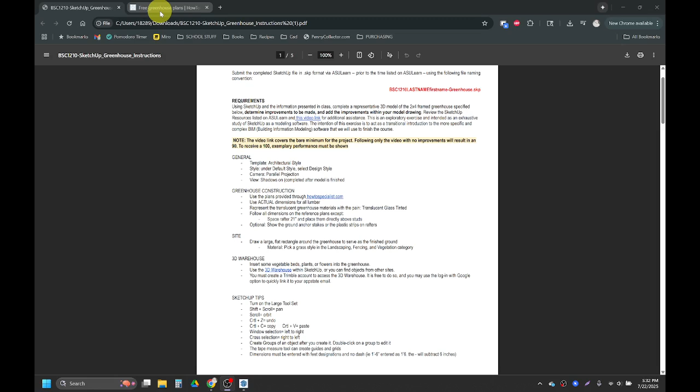We're going to follow a couple of instructions through our instruction file on ASULearn, but a lot of our measurements and pieces are coming from this website, which is also linked into the instructions for this basic greenhouse design.

The first thing we're going to do is open up a blank SketchUp file through the architectural template. We're just going to wait a little while for it to launch.

I have my SketchUp situated a bit to work with how I like my toolbars. If you're opening SketchUp for the first time, to change your toolbars around, go into the View tab and then Toolbars. By default, you only have the Getting Started tool set, but I prefer the large tool set over the Getting Started tool set.

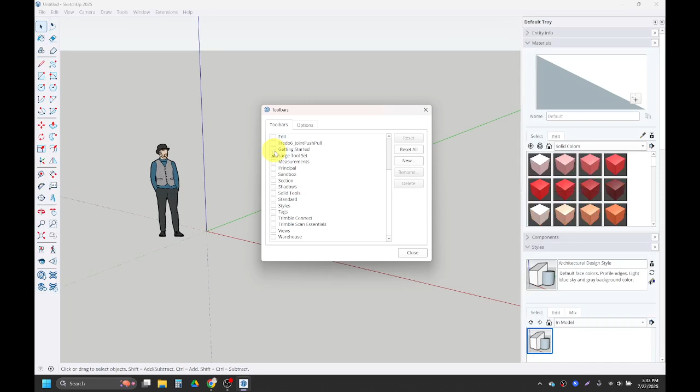I also like to have the measurements checked off, that way I can see what I'm working on down here. I also like the views option so I can quickly snap to my orthographic views. Then close out. The other thing I prefer when working in SketchUp is to turn perspective mode off.

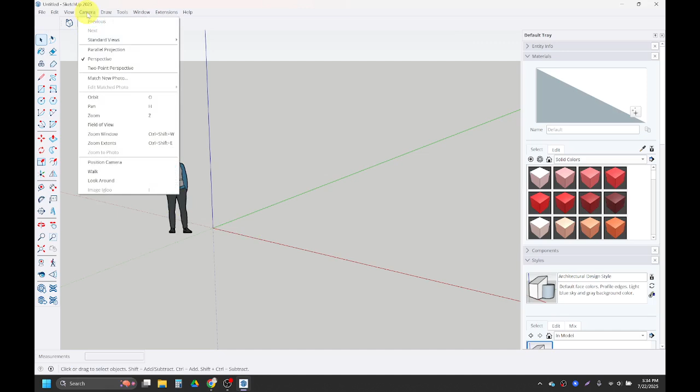I like just working in parallel projection, so I'm going to go into my camera and turn parallel projection on instead of that perspective mode.

Our first step is to lay out our 4x4 base of our building. This is going to be made out of just 4x4s, and it's 10 feet wide and 14 feet long. We'll make those 4x4s 3.5 inches in both directions to use actual dimensions instead of nominal.

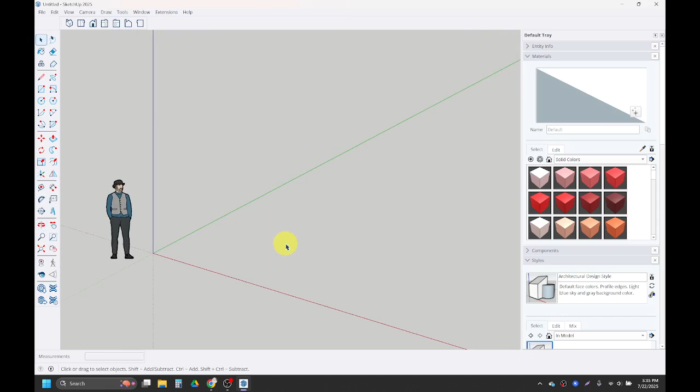As a reminder, to move around in SketchUp you can click your scroll wheel down like a button to orbit, and hold the shift key with the scroll wheel to pan around. To start with that base, I'm going to use the rectangle tool, keyboard shortcut R, or this button here.

I'll start it right on that origin point. I'm going to pull myself diagonally, making sure I'm getting that blue feedback. I'm going to type 10 foot, making sure I'm putting that single apostrophe, comma, 14 foot, enter.

Now to bring in the thickness of that 4x4, I'm going to use the offset tool, keyboard shortcut F, or this button right here. I'll click on that rectangle's face, make sure my cursor is on the inside, and type 3.5. I don't have to put the inches mark, I can just hit enter and it'll assume inches.

Then I'm going to hit the space bar to go back into my selection tool. I'll click on this inner rectangle here outside of the perimeter one I offset, and hit the delete key on my keyboard to get rid of it.

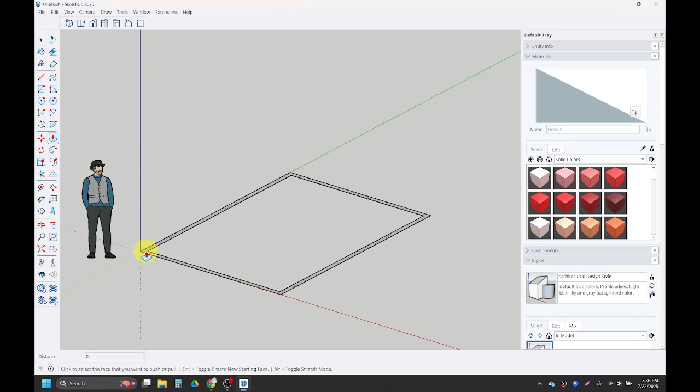Then I'm going to push pull this perimeter rectangle up, keyboard shortcut P, or this button right here. I'll click on that rectangle and move my cursor up 3.5 inches, enter.

Then I'll hit my space bar, and my next step is to make it into a group. I'm going to triple click on it, clicking 1, 2, 3 really fast to get all the faces and edges, then right click and make it into a group.

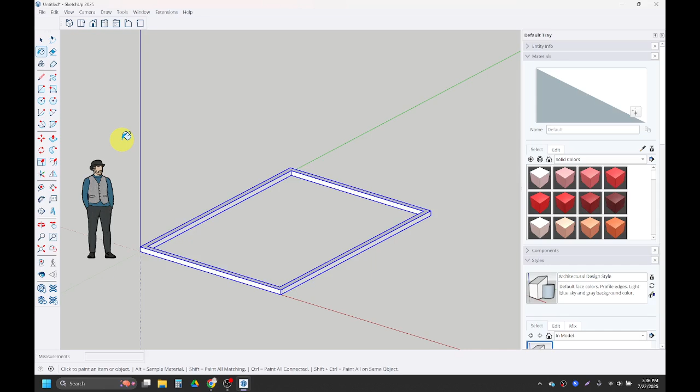Just to keep track of things as I'm working, I'm also going to paint things with different colors as I go. I'm going to go into the paint bucket tool, keyboard shortcut B, or this button here, and I'll make this base this brown color here. Then I'll hit my space bar to get out of that.

My next step is to put down my bottom plates for each of my walls. So I'll scroll down a little bit more.

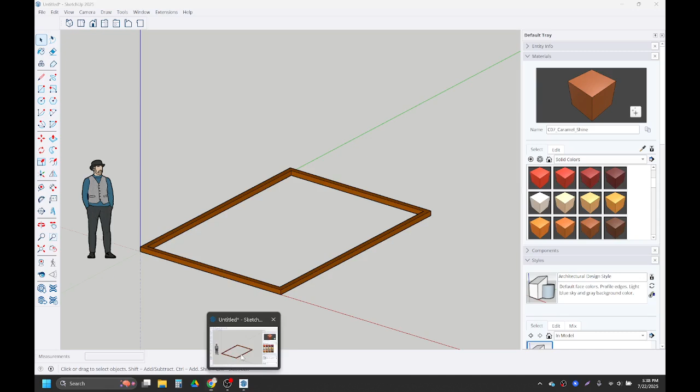So these will be made out of 2x4s, which are 3.5 inches wide and 1.5 inches tall. These bottom plates are going to run 14 feet long on both sides, and this plate will run however long that one is. I'm going to first focus on these longer ones, since this would be 10 feet minus 7 inches, or 3.5 on each side. But we don't need to do that math, and I'll explain more when we get there. So I'm first going to make my bottom plate here.

I'm going to start the rectangle tool again, keyboard shortcut R, or this button here. I'll start on this corner and hover without clicking so I can see where it would fit. I could also type 3.5 inches, comma 14 feet, to place the rectangle, but I'm just going to hover over it, Control Z to show again, and click on one corner. If I hover over this point without clicking, I can see where it would extend, and then click to make that. Then I'll push pull, keyboard shortcut P.

I'll click on that rectangle and bring it up 1.5 inches, enter. Then I'm going to make that into a group, so I'll hit the space bar, triple click it, right click, and make it a group. I'll paint this one as well as I go, using this golden beige color.

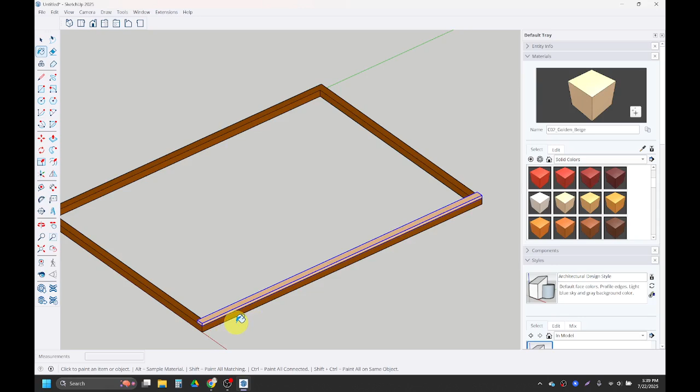I'm going to build out the rest of the wall to make it a little easier to copy over to the other side, but I could copy this over here right now, I'll wait. So I'll hit my space bar to get out of the paint bucket command, then start the rectangle tool again, keyboard shortcut R. I'll start it on one of these two top corners, making sure I'm getting the feedback that it is flat in blue.

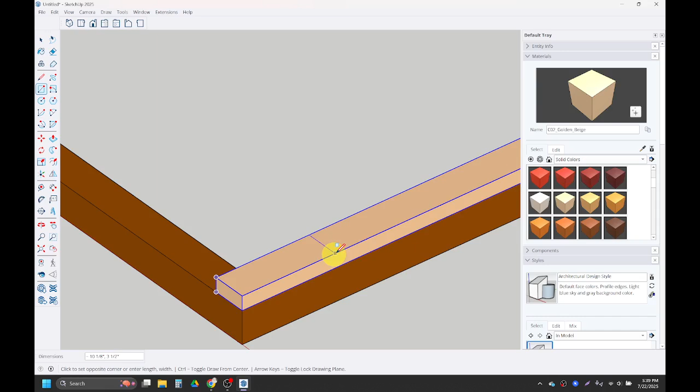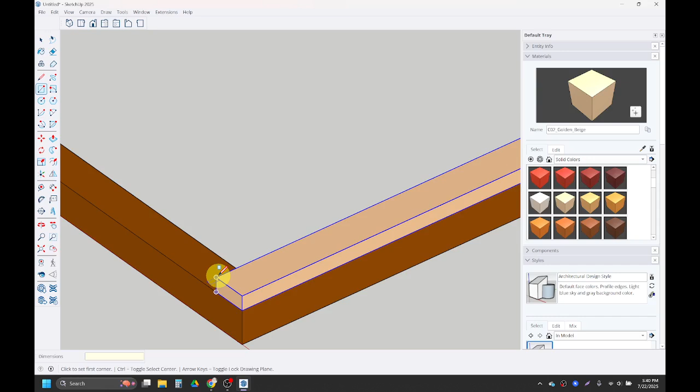If I'm ever unsure which number is which, like which is the first number I type versus the second, what I usually do is make something long and skinny. So we can see this current rectangle is 1 inch and then 10 feet long, which tells me the first number I type is this direction, and the second is this direction. So I'm going to do 1.5, comma 3.5, enter, which, whoops, Control Z, I think I did that wrong. Let's do 3.5, comma 1.5, enter.

And of course, I can always just undo it. Then I'm going to push pull that up, keyboard shortcut P, click on that rectangle, and go up 6 foot, enter. Hit the space bar, and then make this into a group, triple click, right click, make it a group, and I'll paint this one as well with that same beige color.

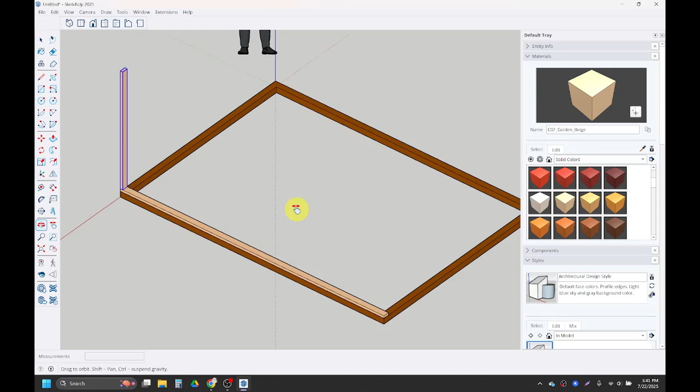Then I'm going to copy it along my path here, using 21 inches as my spacing, and I'll just make an adjustment for my last one. To copy it, I'm going to orbit around to give myself a better view, and pan with shift and the scroll wheel a bit as well.

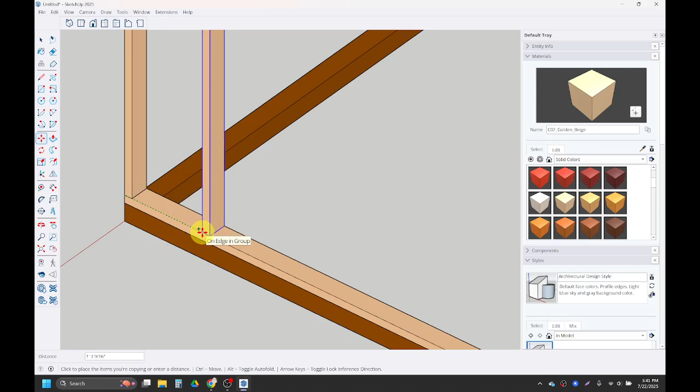I'll hit my space bar, select my object first, and then start the move tool, keyboard shortcut M, or this button here. I'll grab it by the corner, but while moving it, tap the control key to copy, make sure I'm going straight on the green axis, and type 21, enter. Before doing anything else, I'll also type X7, enter, to make 7 copies. And if I needed another one without typing anything else, I could do X8 to make another one.

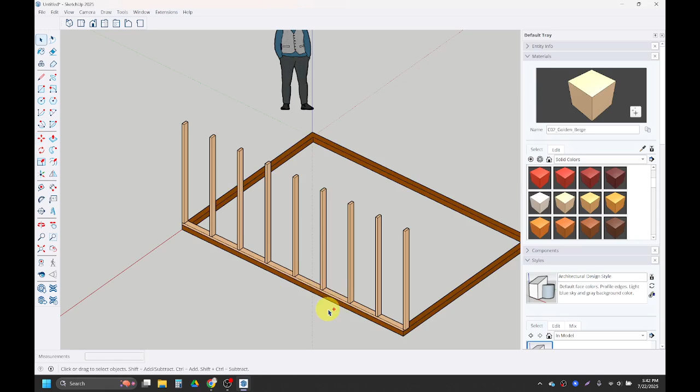Now, if your array didn't work, or maybe you left the command or went back into it, you could always just Control Z to undo and try again. So again, click on the object you want to copy, start the move command with keyboard shortcut M, grab it by the point, start moving it, and tap the Control key to copy it. Type 21, enter, then X8, enter, to say I want 8 copies of it. Then I'll pan over to this last one, because it just needs to move in a bit, so I'll click on that endpoint and squeeze it in so it sits there.

I'm going to hit my space bar 100 billion times.

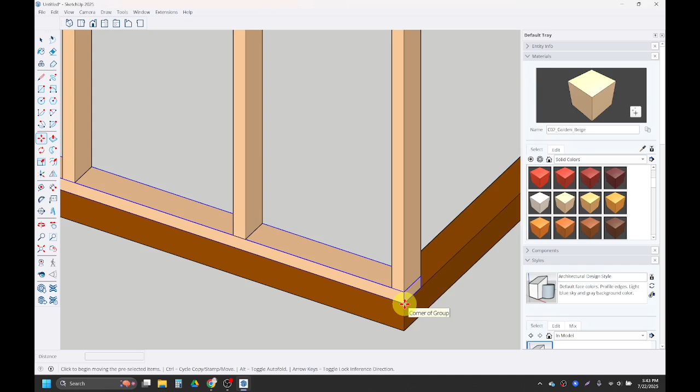I'll click on my bottom plate here as well, and I'm just going to copy this up to make my top plate. I'll start the move command, grab it by that bottom corner, tap the Control key to copy it, and then place it up here at the top. I'll hit my space bar to end that move.

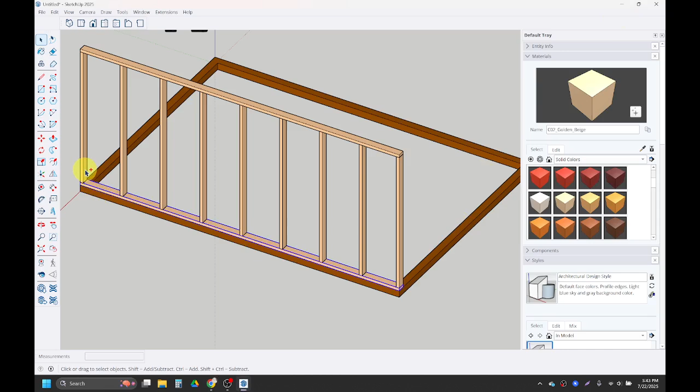I'm going to copy this whole wall over to the other side instead of making it a second time. I'll click on one of them, hold the Control key so I can select a bunch of pieces all at once, clicking on each of them. I can even right click and make all of these into just one group if I want.

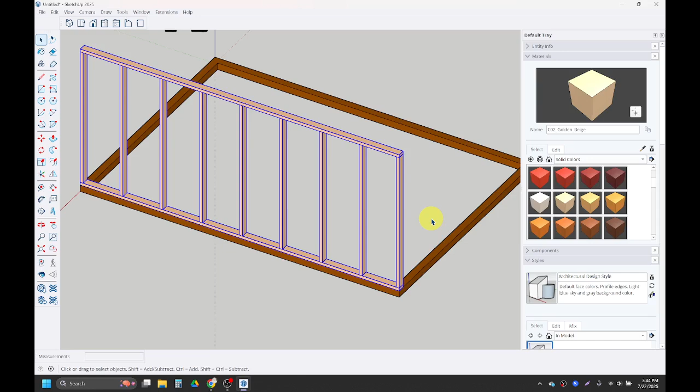So now they're all one joined group, and I'm going to use the move tool, keyboard shortcut M. I'll orbit around a little bit to the other side so I can grab it by this bottom corner, tap the Control key to make it into a copy, and then put it over here. I'm going to do pretty much the same thing with my walls, but using a different measurement. I'll hit my space bar to get out of that move command.

I'm going to make a rectangle, that's this button here, or keyboard shortcut R, from one corner, orbiting around to my other corner, looking for the feedback that it's solid blue. Then I'll push pull, or keyboard shortcut P, bring it up, and I could type 1.5 inches, or hover my cursor on this face and it'll bring it up 1.5. I'll hit the space bar.

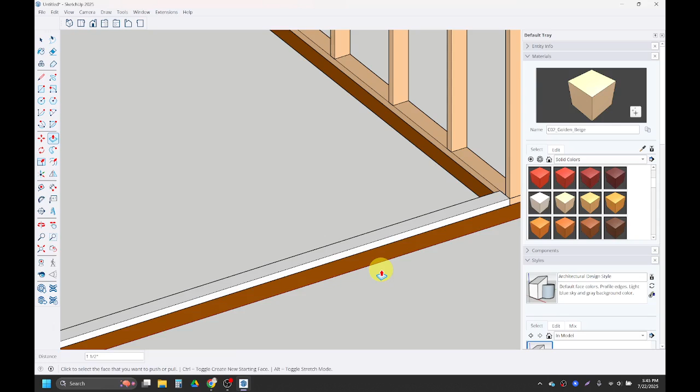Then I'm going to group this bottom plate, so 1, 2, 3 to triple click it, right click, make it a group. I'll paint it at this stage too, making it that same golden beige.

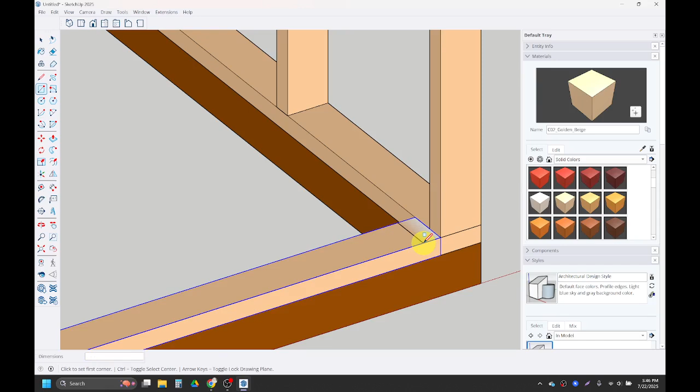And then I'm going to put in one of my studs. I'll start the rectangle tool on a corner, typing 1.5, comma 3.5, enter. If yours is the wrong way, just do Control Z and type 3.5, comma 1.5. I'm going to push pull this stud up that same height, so I could type 6 feet, or just click to make it that same height. Hit the space bar.

Then I'm going to triple click this stud, 1, 2, 3, right click, make it a group, and then use my colors to paint it. I'm painting them as I go, partly to help visually see it, but also because if I paint them beforehand, it'll go along with the copy, making it easier to copy.

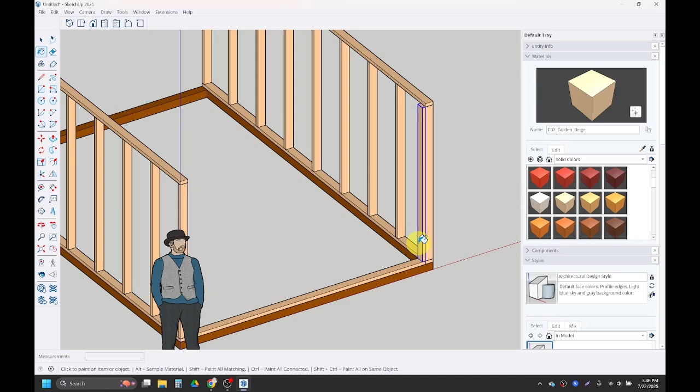Then I'm going to copy this stud. I'll start the move tool, click on one corner, tap the Control key so I can move it over 3 feet, making sure my cursor's straight on that axis. I'll click again, tap the Control key 3 feet, and then, whoops, I right clicked.

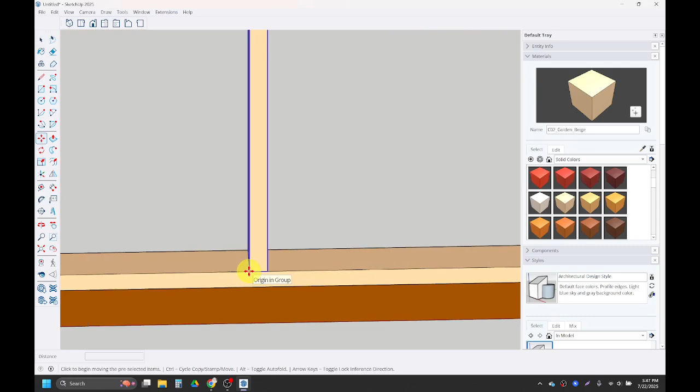And then I'll click on this stud, start the move tool, grab it by this corner, tap the control key, and put it on that corner. Hit my space bar, and I'm going to copy this bottom plate to become my top plate. So again, click your bottom plate, start the move tool, click the point you want to grab it by, tap the control key, and then choose where you want to put it.

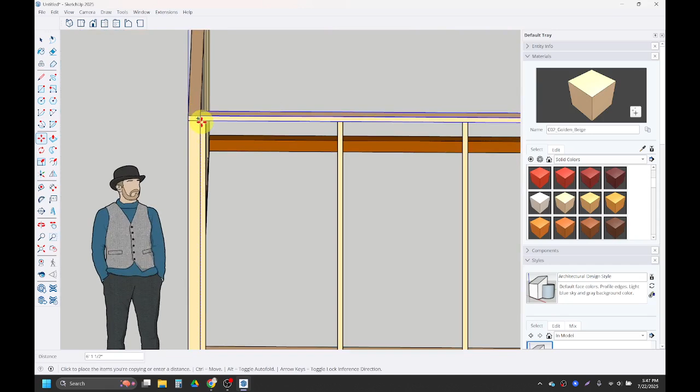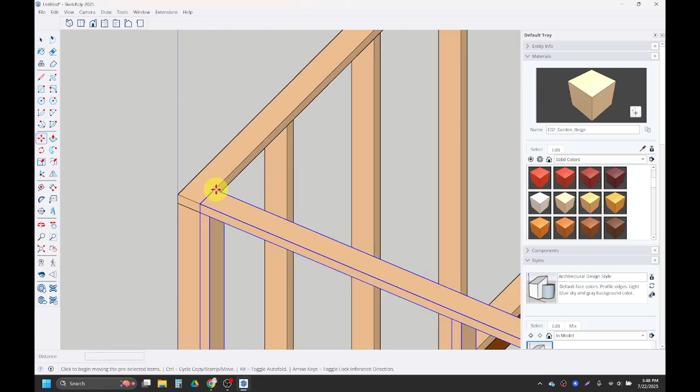And then I'll copy these pieces over to the other side. So tap my space bar, and if I want to add things to my selection, I can hold control to select all 6 pieces that would be this wall. I'm going to right click and make them into a group, and then move them. I'll grab it by this corner, tap control to copy, and put it over here. So that way I've got the basic structure of my walls set up.

Next, we're going to work on our rafters. Let me hit escape and then the space bar to move that around. For the rafters, we'll work with our tape measure tool to get some of these angles cut. I'm going to first look at my building head on from the front, then use the protractor tool to get my 60 degrees here, and it looks like we're going to make it 87¼ inches.

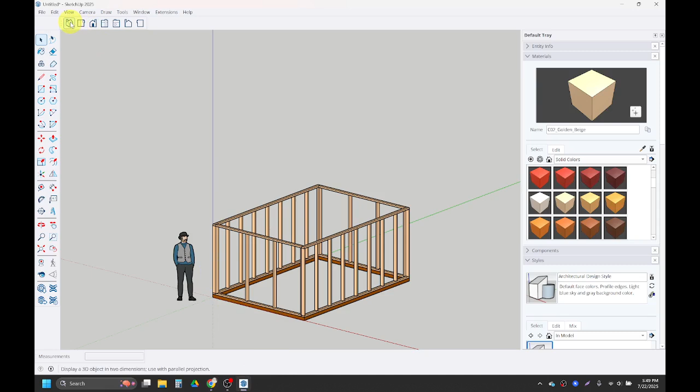I'm going to use my views here to look at it head on from the front, and then very carefully, without changing my orbit—holding shift and the scroll wheel—I'm going to use the protractor tool, which is this button here. I'll start it on that corner, click on that corner, go on the red axis, click again, and then go up.

I believe it said 60, but I think we want 30 degrees. Let me double check. 30 degrees, that's right, I thought so. So let me do 30, enter.

To figure out how this shape's going to come together, I'm going to use the tape measure tool to bring that down the thickness of that 2x4, which is 3.5. I'll use tape measure, keyboard shortcut T, or this button here, to click on this guide, and bring it down 3.5.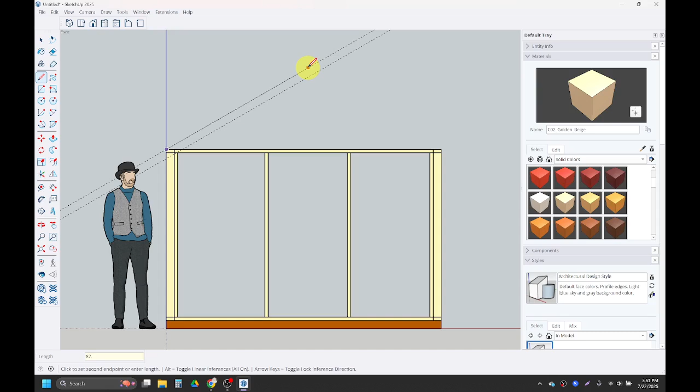Then I'll start with my pencil tool, this button here, or keyboard shortcut L. I'm going to start it there, go up on that line, 87.25, go straight down, straight over until it is filled. I'll orbit around a little, hit my space bar, use push pull, keyboard shortcut P, grab it, pull it out 1.5.

Then of course I'm going to group that. I'll hit the space bar, triple click it, 1, 2, 3, right click, and make it a group.

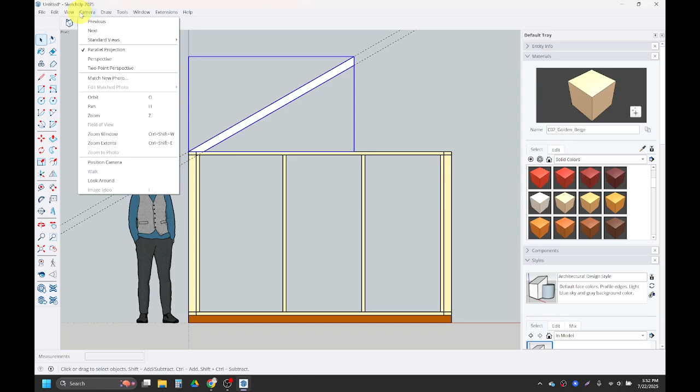Let's look at it from the front again, so I just went to my views here. If you didn't put your views bar in, you could go to camera, standard view, then front, but I like these shortcuts. Then we are going to make another one here—another protractor, go up at 30 degrees, and we'll bring it down and it'll meet where it meets.

I'm going to use the protractor tool, this button here. Start it on this corner, click to go to the red axis, click again, and then go up 30, enter.

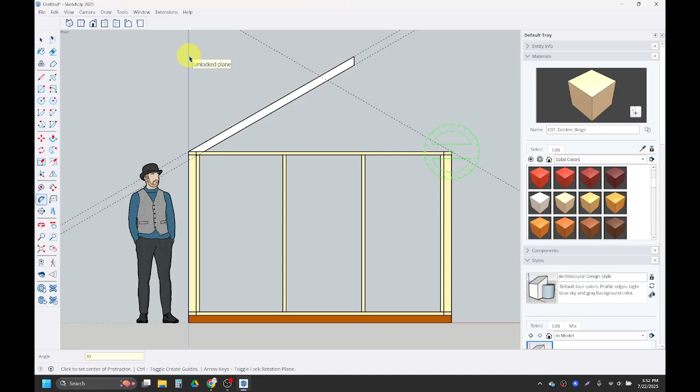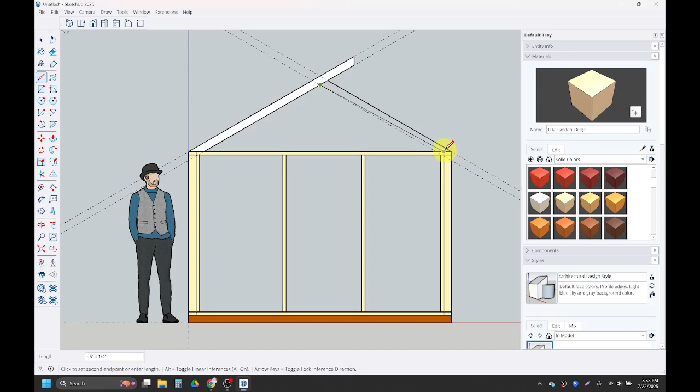Then I'll use tape measure, keyboard shortcut T, or this button here, to click on that line, down, parallel 3.5, 3.5, enter. Then I'll use my line tool, keyboard shortcut L, or this pencil button, to fill in this area. Then I'll push pull it out, keyboard shortcut P, grab it, move it out 1.5 inches, and space bar to end the command.

And then make that into a group. I'm going to triple click it, 1, 2, 3, right click, make it a group, and then I'll paint both of these as well, using my golden beige to paint both of those colors.

If the guides here, these protractor guides, are bugging you, we don't really need them anymore. So within our—I believe it's either in the camera or the view, maybe just kidding, it's in edit—we can go into the edit tab and do delete guides, and then they'll all just go away.

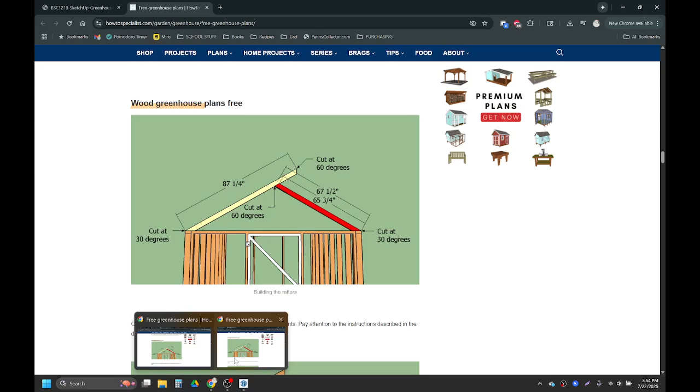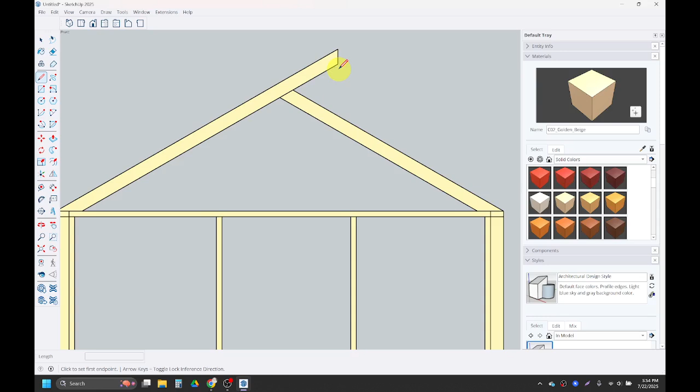Next, we'll just fill in this area here. We do have some measurements we've been given, but we can also make some inferences of what we have. So I'm going to go into SketchUp and look at my building straight from the front. I'm going to draw a line, keyboard shortcut L, straight down.

Then I'll use my tape measure tool, keyboard shortcut T, to click on this line—I don't want to click on the midpoint, I want to get this red on edge. I'm going to go over 3.5, enter, and then use my line tool to finish this shape up.

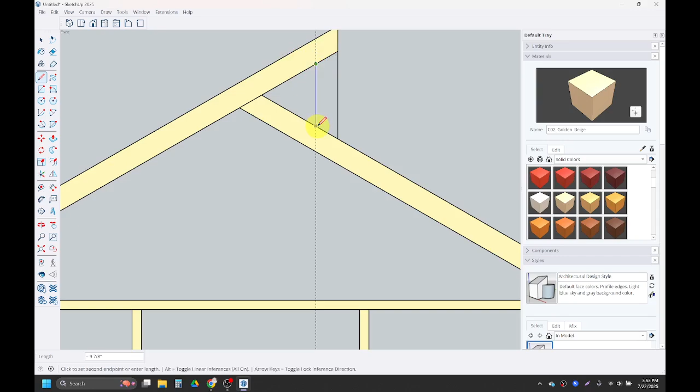And then I'm going to push-pull that out. I'll do keyboard shortcut P, click on that face. I could go 1.5 inches, or I could click on the edge of this group, hit my space bar, 1, 2, 3, triple click it, right click, make it a group, and then paint it a color.

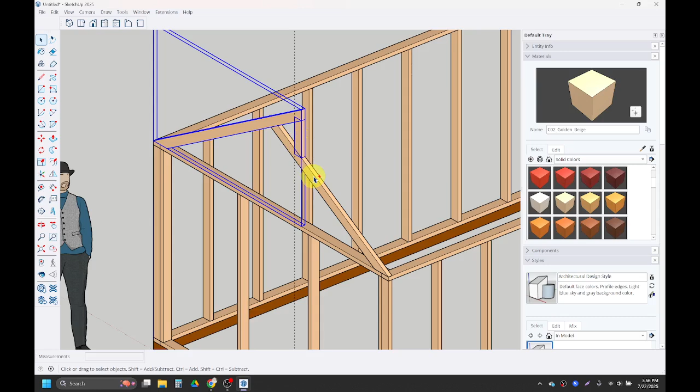So I'm going to take all 3 of these objects and group them together just to make it easier to copy these around or copy them down the line. I'll hit my space bar and click on one of my rafters, hold control, click on that spacer, and while still holding control, click on my third one here. Then I'll right click and make them all into a group, so they're all one group together.

If this guide is bugging you, you can click on the guide directly and hit the delete key, or you can go into the edit tab and delete the guide there.

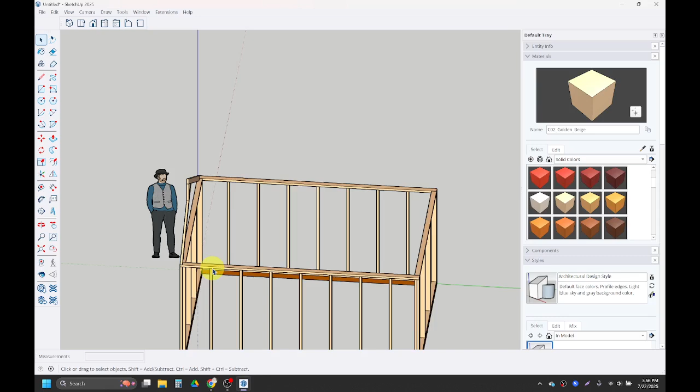So I'm going to copy these down the line, kind of where each one of my studs is sitting. There's a couple ways I could do that. One could be that I click on it, start my move tool, grab it by that corner, tap the control key to copy, and then line up. If I hover over that, I can figure out where it would sit and click it. Or I'm going to control Z to undo that.

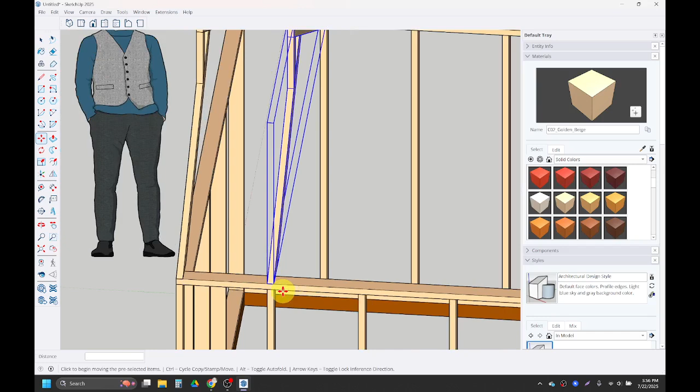We could do that same thing we did for the studs. So I'm going to click on this roof rafter here, use M for move. I'll click on my bottom corner, tap the control key, and go over 21, enter. Without moving anything, I'll do X8, enter, so now there's 8 of them going across. My last one though, the spacing didn't work out, so I'm just going to click on that last one's corner and move it so it sits on the building's corner.

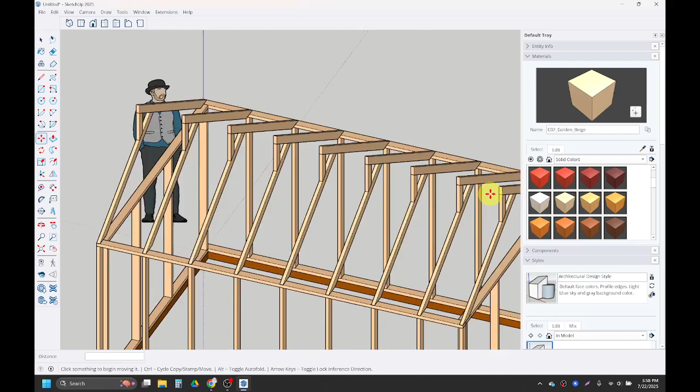Next, I'm going to build out these 2x2 kind of frames for the windows that are going to go in the greenhouse. We'll put some awning windows in here. For that, we'll use kind of the same ones all across aside from this one, because this one will have a little bit of different spacing happening in it.

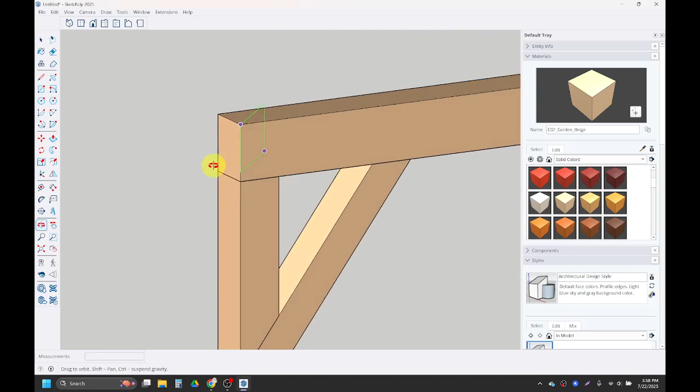So I'm going to hit my space bar, and on this corner here, I'm going to start with my rectangle tool, that's keyboard shortcut R, or this button here. On the corner of this group, I'm looking for that feedback of this green face. Let's see, do I want to put it right on that corner? Let's see where he puts his. No, he puts his down further, so we're going to do that. I'm going to hit the space bar to end it.

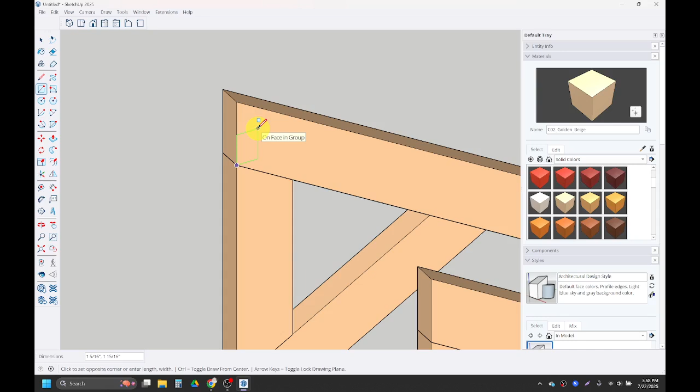I'll go back R, start it on this bottom corner here, and do 1.5, comma 1.5, enter. Then I'm going to use push-pull, keyboard shortcut P, to grab it and pull it to this face for this group here. I'll hit my space bar again to end the command, then triple click, 1, 2, 3, right click, and make it a group.

Then I'll copy it down to the bottom rafter. So let's orbit around and pan a little bit. There we go, my perspective was kind of throwing me off. I'm going to use the move tool to grab it by this top corner here, tap the control key to start copying it, and move it there.

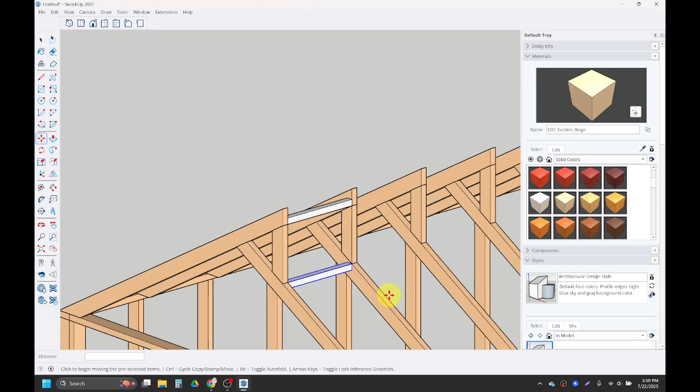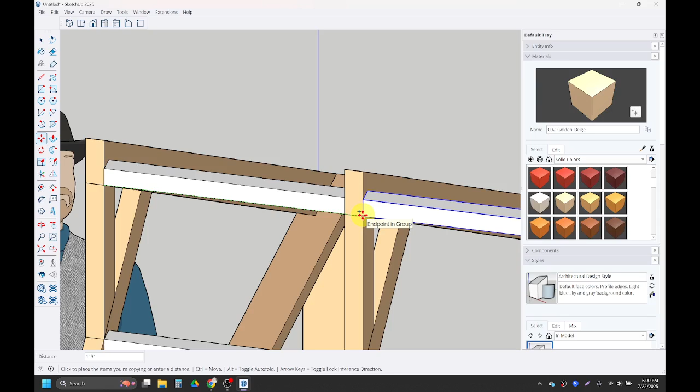Then I'm going to select both of them. I'll hit the space bar, select the first one and the second one by holding control. Then I'll start the move tool. I'll grab it by a corner I know, tap the control key, click where I wanted to place it, and then X8, enter, to make 8 of them.

However, I actually only needed 7, not 8, but that's okay. I'll hit the space bar to finish it, and just click on these 2 at the bottom to delete it. The real problem I was planning on facing was the fact that this one and this one are too long because we had to move this last rafter in.

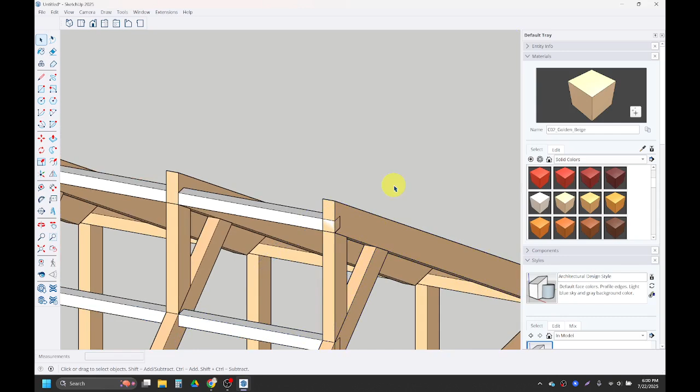So to fix that, if I double click on this group, we'll see everything else got grayed out. So what I'm doing is editing this standalone group. Then I'll go into the push-pull tool, keyboard shortcut P, or this button here. I'm going to grab it by that face and pull it to that face.

I'll hit my space bar, double click outside of that object, and then do the same thing on this one. I'll double click in it, push-pull, click on that face, and then bring it in to this face. Space bar, double click outside of it.

Our next step is we're going to add in some windows, and we're just going to go find some windows from the 3D warehouse. So to get to the 3D warehouse, you might have a button here on your screen in your toolbar, or you can go to the window tab and then 3D warehouse. You do need to be signed in to a SketchUp account or a Trimble account.

I'm just going to search for awning window. Let's load some more. If not, we can use one of these, but I like this one because it says simple.

So I'm going to use this simple awning window. I'm going to download it. It's asking, do I want to load it directly into my model? I'm going to say, yes, I do.

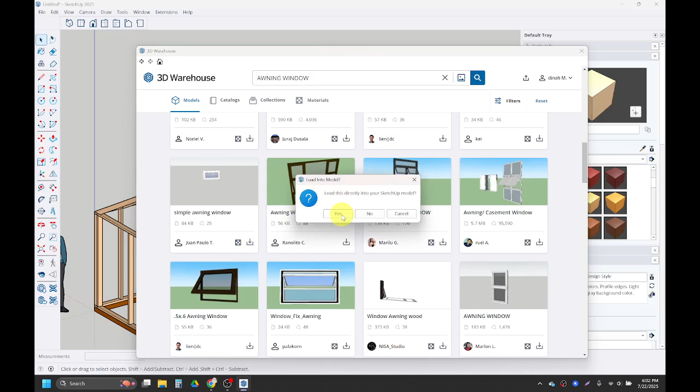And then I'm just going to click somewhere to place it for now. So I clicked to place it. I'm then going to grab it by an endpoint to move it into my window, but it doesn't fit yet. So my next step then is I'm going to have to scale it.

So to start the scale tool is keyboard shortcut S or this button here. You'll have to make sure too that you have your window selected. So make sure you have your window clicked on, and then you can start scale with this button or S.

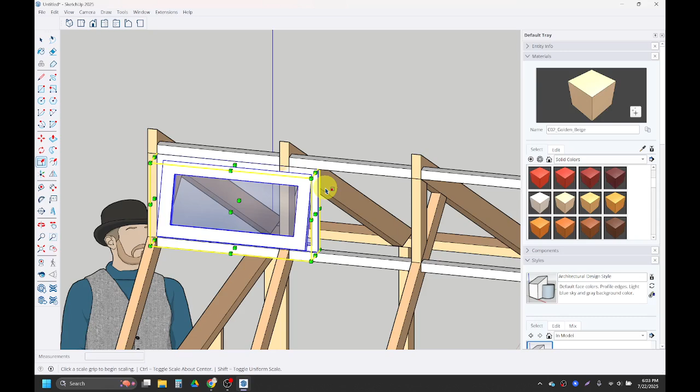And what I'm going to do is grab it by my middle grip here, just to move it on this space to the edge. And I'm also going to grab by my middle top grip here to make sure it's on all of my faces. So I'm just kind of moving it up, and then I'm clicking and dragging it so that way I can kind of lock it to that frame face.

So that way I'm just making it the size that I wanted to. Then I'll hit my space bar to end it. And then I'm going to copy this into each of these. So I'll make 7 copies and I'll modify this last one to fit.

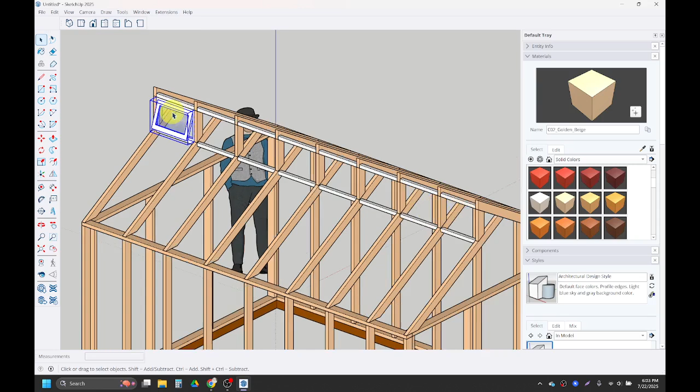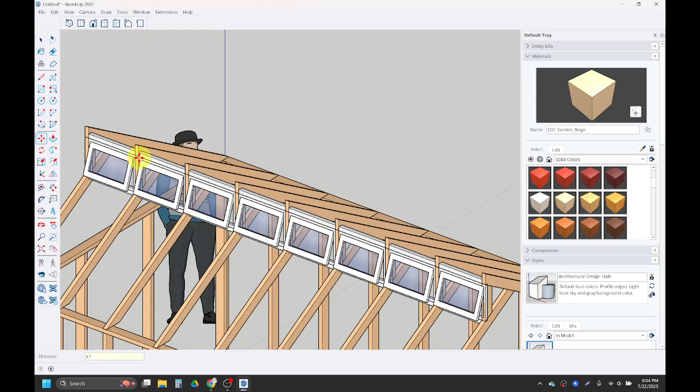So I'm going to start my move tool, which is keyboard shortcut M. I'll grab it by a corner. While I'm moving it, I'm going to tap the control key and then see where I want it to go. So I'm going to put it right on that corner, and then I'll do X7, enter, just to make 7 copies. I'll hit my space bar to end it, and then I'm just going to have to adjust the scale for this last one.

So I'll click on the last one. I'm going to do keyboard shortcut S for scale. You can also grab by these corners as well to just kind of quickly adjust it into size for it. So that way that one just has ever so slightly different size.

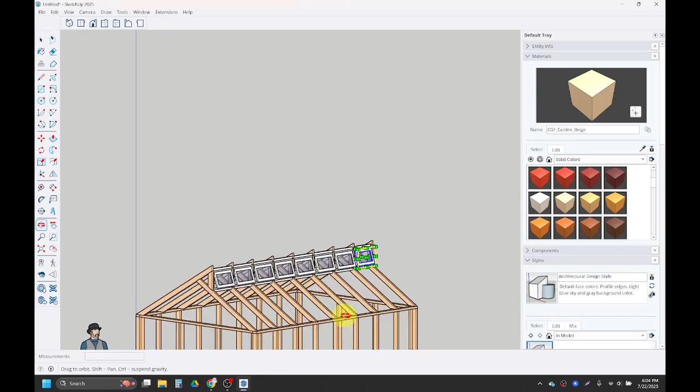I'll use the 3D warehouse as well to put a door in here as well. So I'm going to go back into my 3D warehouse. Again, that's going to be this button here, or window 3D warehouse. Sometimes if you're on a smaller screen, this button kind of disappears. Let's look for something like screen door.

Okay, I'm just going to go with this one here. It's a pretty simple design. The more simplistic a design is, the easier it's going to scale and move. But like that one, she's pretty cute. But I'm going with this one. And yes, I'll load it right into my model.

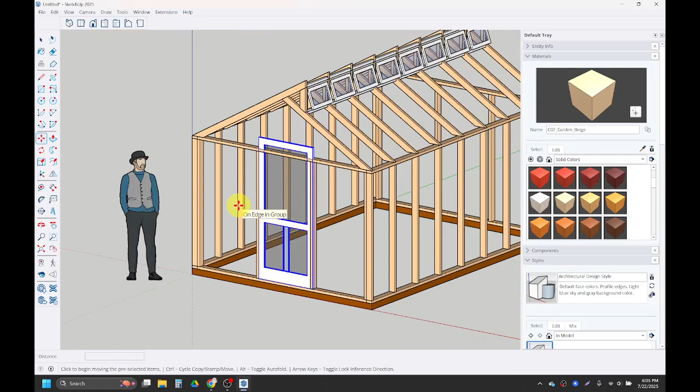I'll click to place it where I want it to go. And then again, it doesn't fit perfectly, but I can use the scale tool, keyboard shortcut S. Sometimes these grips are a little close to each other, but I can zoom in. You always want to go for that middle option. And I can even just grab that corner there to kind of fit it straight into that corner for it. All right, and then I'll hit the space bar just to go back into my selection tool.

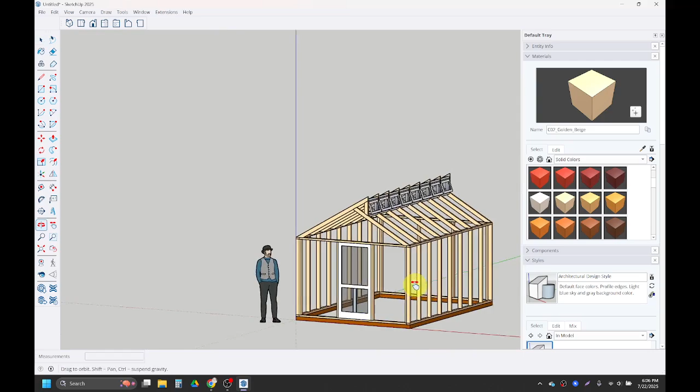Now we have just a little bit more steps to do. So part of grouping everything that makes it really useful is so that this way, if we ever need to cover something with like a cladding or a face, that the structure itself is going to remain in there.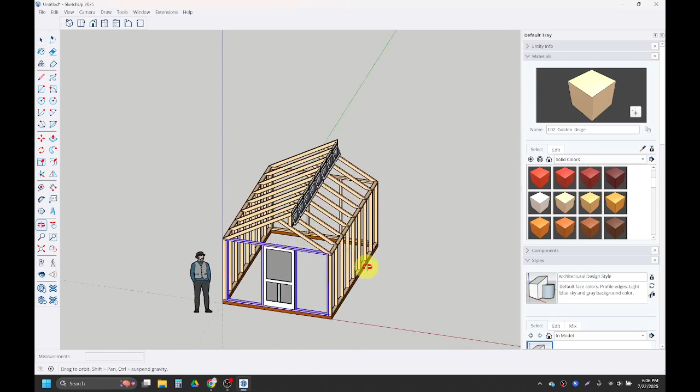So let's first just make a ground for our overall building. I'm just going to do a big rectangle, starting with keyboard shortcut R, and I'm just going to click somewhere far away. And then I'm going to paint that with grass. So I just made a rectangle. I didn't really measure it. So in my materials, let's go for ground.

Got some soil there. Do we have maybe a better looking ground? Oh, I guess not. I guess that's our prettiest grass in the new version. That's okay, I guess. So I'll just go with this beautiful grass here.

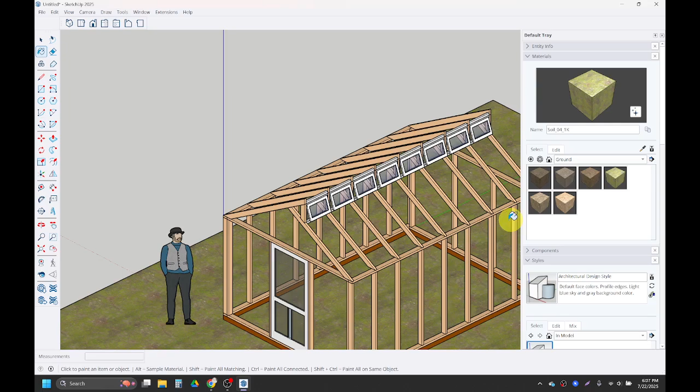The last thing I'm going to do is cover each of these faces and make them glass for my greenhouse. The roof faces might give us a little bit of trouble, but that's okay, we'll get through. We'll go down here to see what that final product's going to be, particularly some of these slanted faces.

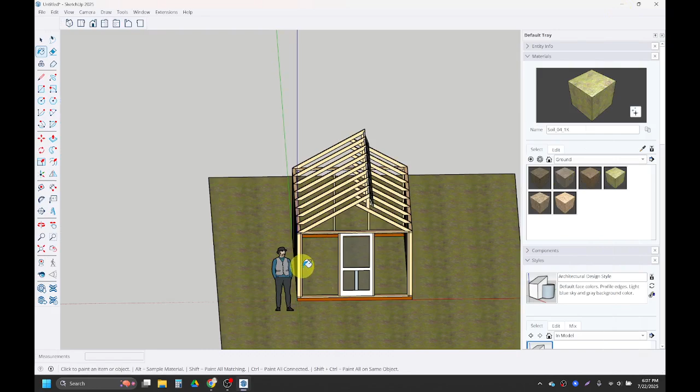So let's do just some of our walls first. I'm going to start with the rectangle tool, and I'm going from my bottom corner up here, looking for that feedback that I'm flat on that red face. Then I'll go into my materials and choose glass.

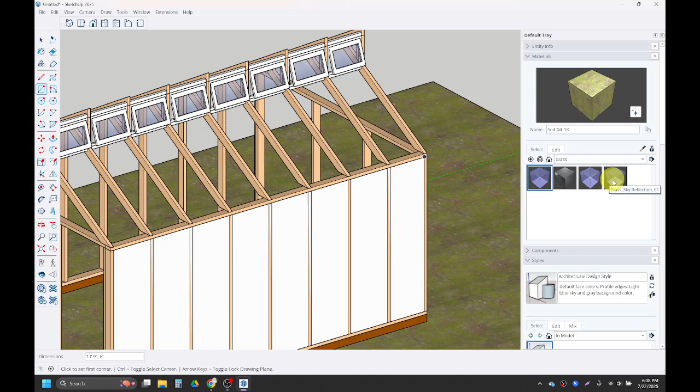We've got safety glass, mirrored glass, basic glass, reflection glass with the sky. I'll just do basic glass, put it on there—maybe safety glass. Safety glass at least gives a little more of an appearance to it. Mirrored, no, I don't want mirrored. I'll do the safety glass to give a bit more appearance.

Let's do another rectangle. These are just going to be flat face rectangles, and we can even do all of them at once. I won't be able to do a rectangle here.

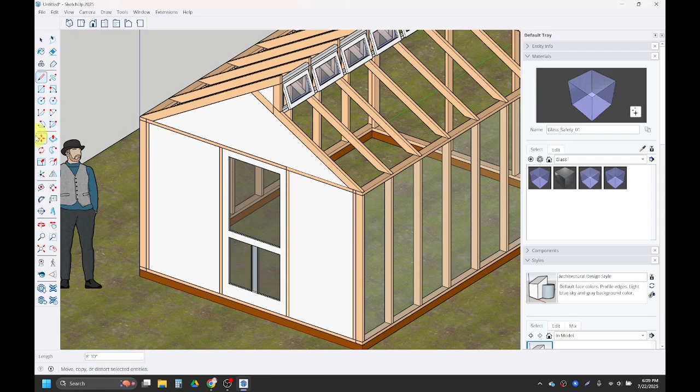Here I'm going to have to use my line tool, just tracing around, trying to make sure I keep stuff flat. You might be saying, sometimes you're stopping at studs, sometimes you're not—what's the difference? Unfortunately, there kind of is none, or I guess there is, but sometimes it's just what do I want it to look like. I'll make those glass as well.

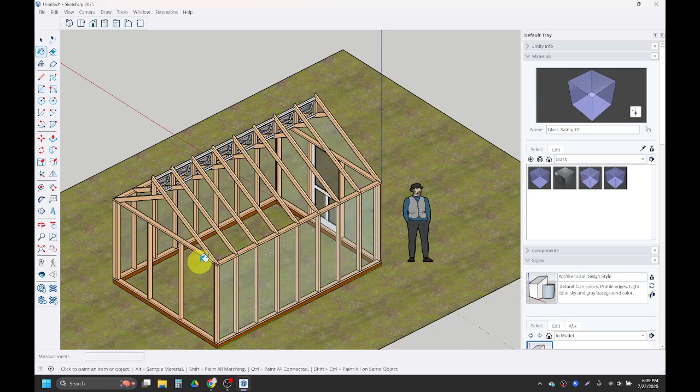On this side here as well, I'll use my rectangle tool, and then paint it with glass. On my back edge, I'm going to use my line tool. For this one I'll put a break in between here and here.

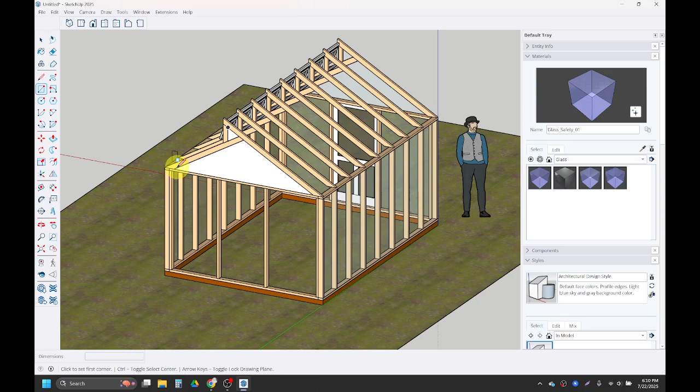For me, SketchUp is really much more of a visualization tool—so we'll use rectangle now—than it is like a technical tool like Revit or AutoCAD. And then I'll make them glass.

What usually gives us the hardest time is let's fill in these rafters here. I'm going to do a rectangle from that point, and we want this green feedback here that we're going to be flat on that face. Sometimes it's hard to get, so I'll do Control Z. Sometimes it wants to do this—we'll see if I move my cursor around.

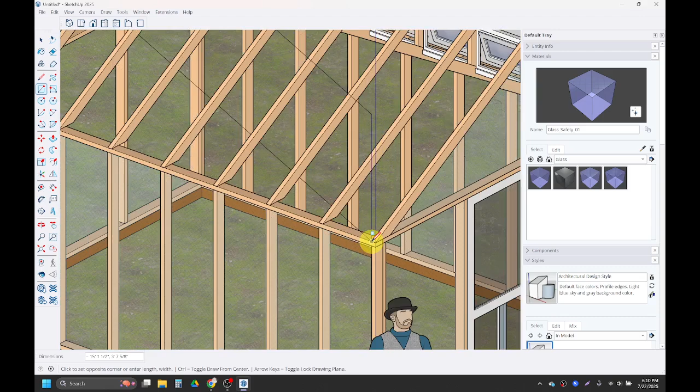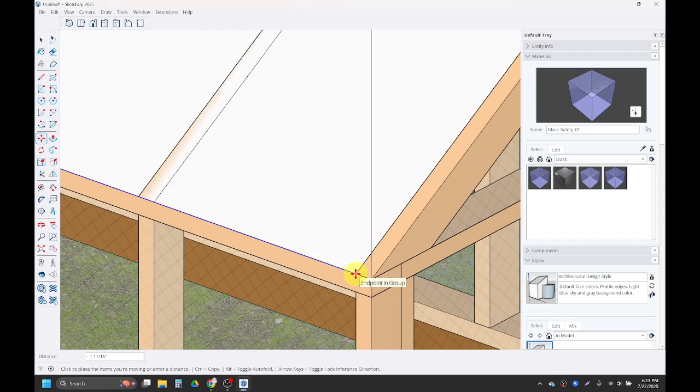Sometimes I get it, sometimes I don't. Sometimes, see here, it'll give it to me until I get to that bottom point. So what I could do is hit my space bar, click on just that bottom edge, and use the move tool to move that edge. Click on that point and bring it down. So if it won't do it, you can manipulate it.

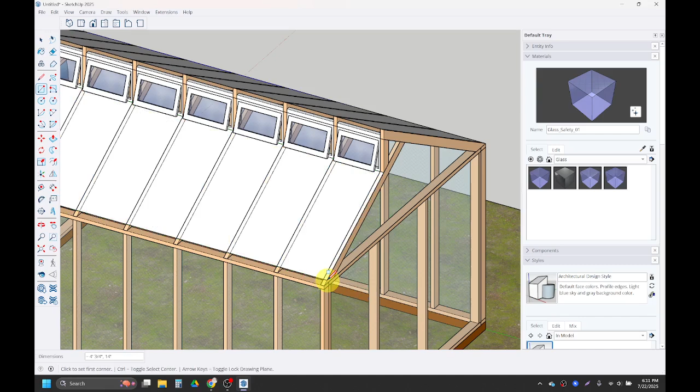Same thing then on this other side underneath here. So we start the rectangle tool, starting on this corner here, looking for that feedback of the green face. But if it keeps giving you this diagonal weird face, you can just click up a little bit, hit the space bar, click on that bottom edge, just that edge, M to move, click, and then bring it down. And then let's also paint those with glass.

Should I make them sky? Sky, because they're looking up at the sky, I guess. And so that is your greenhouse as a 90. You don't need to group the glass necessarily because they are just faces for it in there.

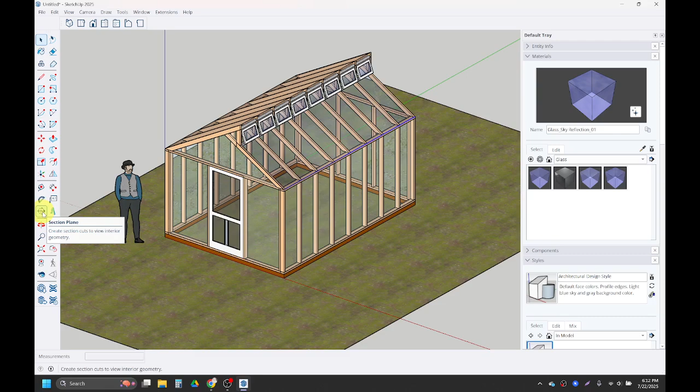If you were looking to add anything into your greenhouse—say you wanted to put any plants or features inside of it to help prove that mastery of SketchUp—what you can do is put in a section plane. That's this button here. Then click on the blue plane. Don't worry that everything goes away, and you can name it floor plan cut.

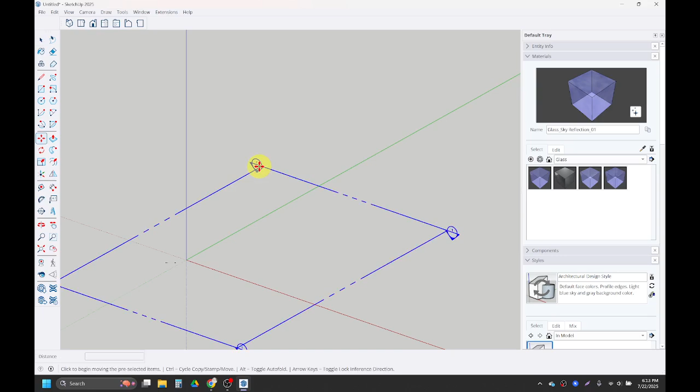Then use the move tool, keyboard shortcut M, to grab that section plane or click on it, M to move, and then you can grab it and move it up and down. So you can cut it open, that way if you wanted to add parts or features inside of it, you can. But that would be our greenhouse assignment as a 90.